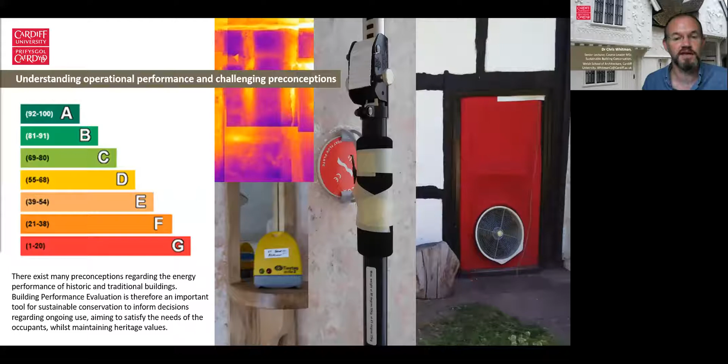This particular case study is a Grade 1 listed 14th century hall house in Saffron Walden. It's a timber frame construction with a timber frame infilled mainly with wattle and daub, but with some brick nogging. The ground floor has been underbuilt with brick at a later date. Perhaps its most notable feature is its 17th century pargetting or sculpted plaster. This was described by the architectural historian Nikolaus Pevsner as amongst the most precious in Saffron Walden.

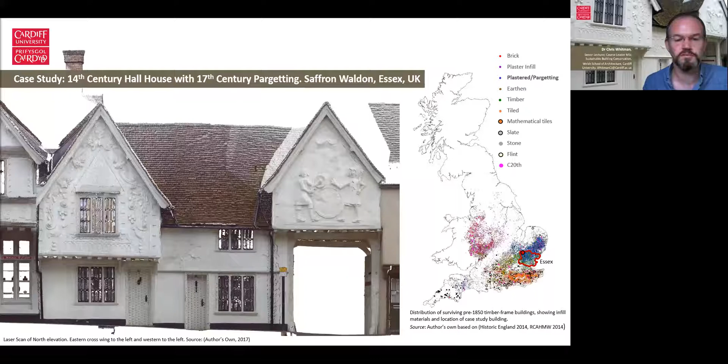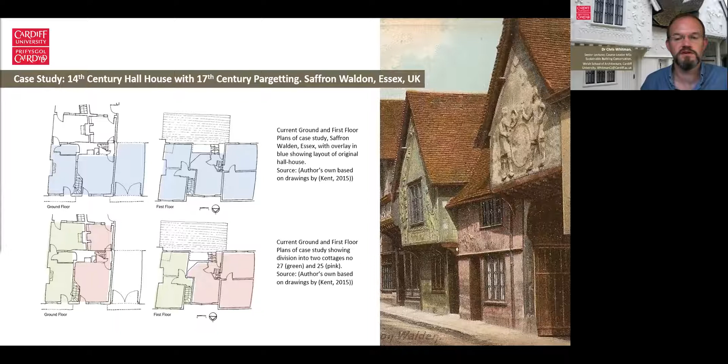When it was built in the 14th century, it was built to a typical hall house configuration with a central double height hall and cross wings. However, it was subsequently divided into two dwellings. The current conservative repair aims to bring these two dwellings back into one house, suitable for 21st century living whilst maintaining the heritage values.

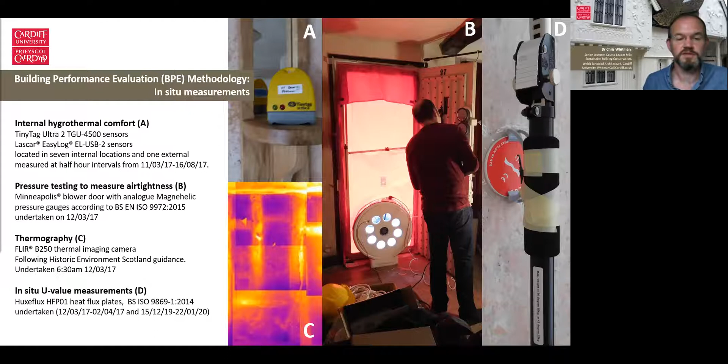The methodology of the building performance evaluation used in situ measurements of internal hygrothermal comfort, pressure testing to measure air tightness, thermography, in situ U-value measurements, in addition to digital simulation of energy demand and frost risk analysis using THERM.

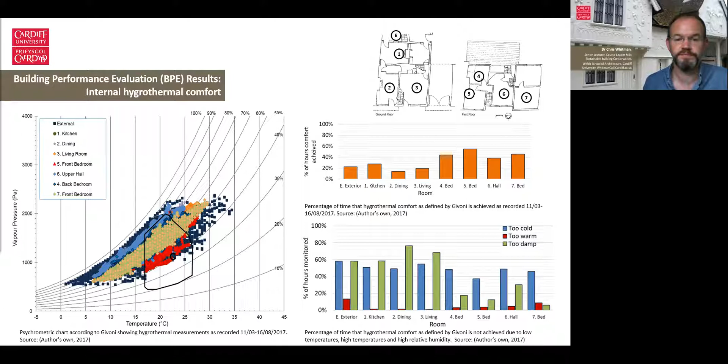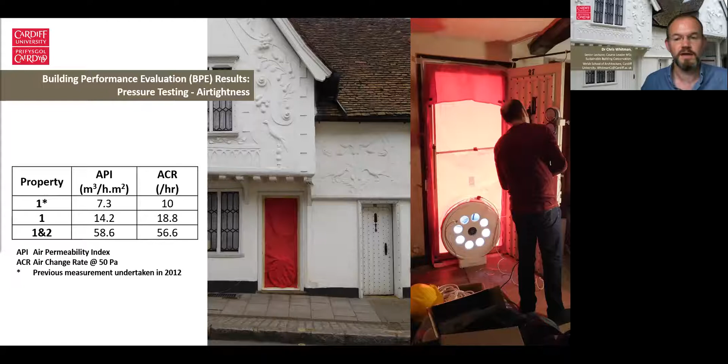With the pressure testing, we can see that there is a decrease in the air tightness since the last measurements in 2012. This is due to the removal of inappropriate 20th century internal finishes. When we look at the two properties joined together, we can see quite a considerable air change rate at 56.6 air changes per hour. However, this is due to the previously mentioned uncontrolled connection to the cellar, in addition to connection to roof voids. These and the internal finishes are issues that will be addressed as part of the conservative repair. And therefore, it is hoped that the air tightness will be returned to that of 2012 or improved. However, future monitoring is recommended.

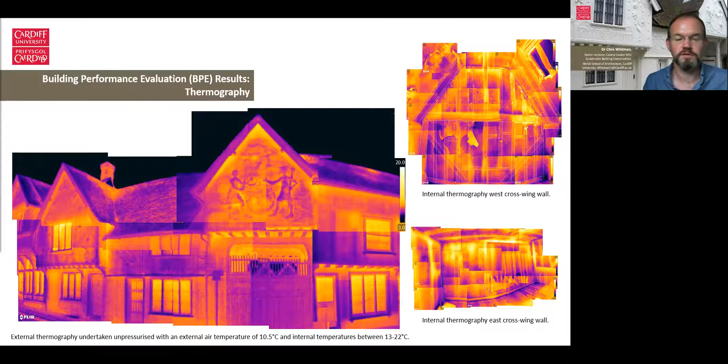With the thermography, we can see that the weakest areas are the single glazed windows, the protruding jettied floors, and the floor of the carriageway. We can also see a difference between thicknesses of pargeting and a difference between the pargeted upper floors and the underbuilt brick ground floor.

With the U-value measurements, the initial measurements at locations M1 and M2 showed U-value measurements surprisingly good at 0.85 and 0.64. These were a lot better than we expected. So further investigation of the thermography showed that there was a problem with the location of our measurements, these being over the top of a previously unknown timber member.

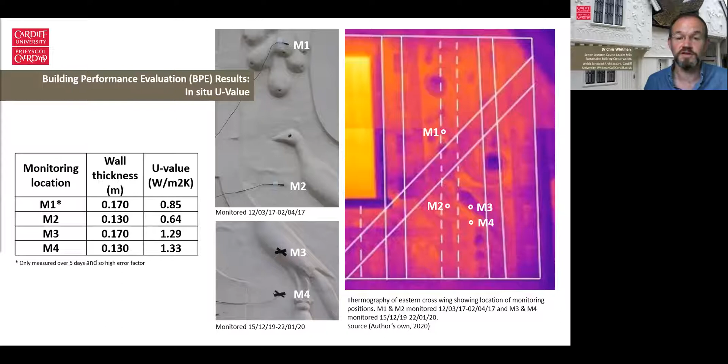Therefore, over the winter of 2019-20, further in situ U-value measurements were taken at positions M3 and M4. This showed a slight difference between the thicker pargeting, and when compared to results of other non-pargeted timber frame buildings with values around 1.7 to 2.9 watts per meter squared Kelvin, we can see that the pargeting is improving these values, and potentially we could think of it as an early form of external wall insulation.

The current heating demand was simulated at 179 kilowatt hours per meter squared. However, if the air tightness could be returned to that measured in 2012, this would reduce to 96.6 kilowatt hours per meter squared. A further 17% reduction could be achieved if both floors, the floor of the carriageway and the roof, were insulated. However, we only see small reductions with the introduction of internal wall insulation.

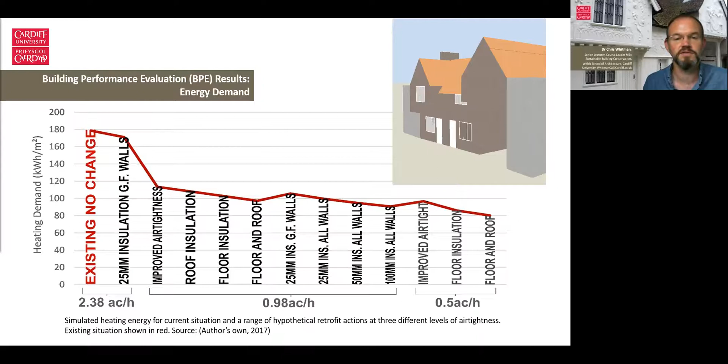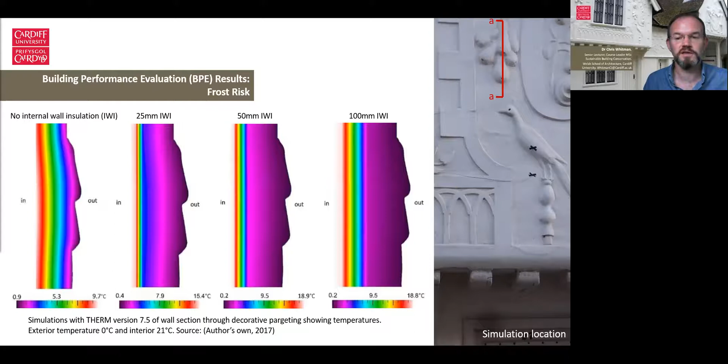And with these, there was a concern over the increase in the risk of frost damage to the 17th century pargeted facade. In order to look at this in more detail, simulation was used with THERM, looking at both the current state and 3 thicknesses of internal wall insulation. With an internal temperature of 21 degrees and an external of 0, we can see that with no insulation, the external surface temperature of the pargeting is 1 degree. With 25 millimeters of internal wall insulation, this is reduced to 0.4 degrees C, and with 100 to 0.2, getting very close to freezing. Given the significance and cultural value of the pargeting, this risk outweighs the benefits.

Therefore, in conclusion, we can see that the use of building performance evaluation has enabled a greater understanding of this historic property, which can now inform the continuing decisions in its conservative repair. Some key findings are that the pargeting appears to improve U-values of the timber frame wall, acting as an early form of external wall insulation. The conservative repair work removing inappropriate internal finishes has reduced the air tightness. However, it's hoped that the new finishes that will be installed will rectify this.

If this air tightness can be returned to 2012 or improved, and the roof and floors are insulated, then potentially we could see a reduction in energy demand of 55%. However, the use of internal wall insulation is not recommended due to the increased frost risk to the pargeting. The research is an example of how building performance evaluation can play a role in our understanding of the complex performance of our historic built environment and the challenges that face us in balancing the conservation of fuel and power and the sustainable conservation of our heritage.